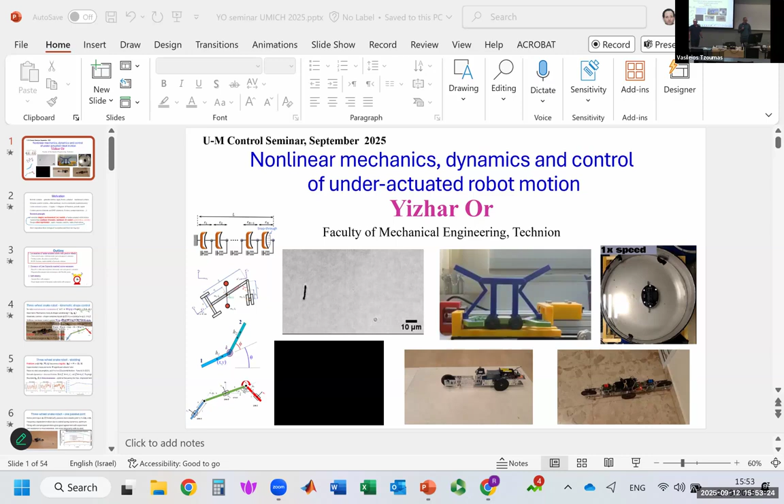So the title of the talk is Nonlinear Mechanics and Dynamics and Control of Under-Actuated Robot Motion. So now we're talking science.

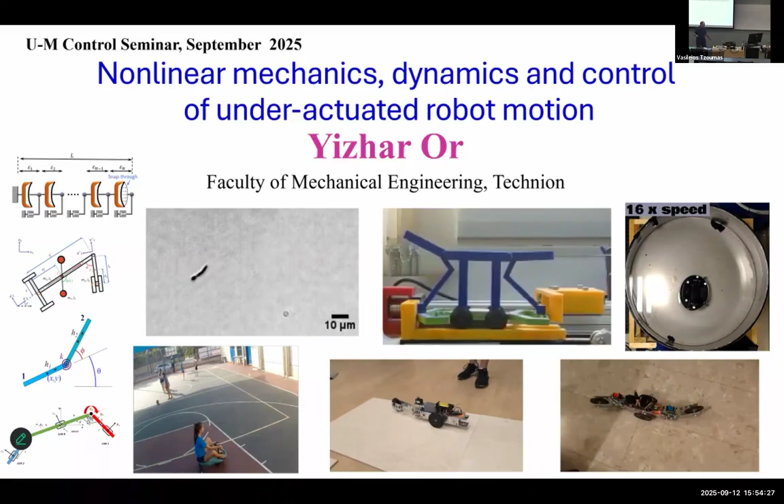I want to apologize that this is not going to be a standard seminar in control theory. I come from mechanical engineering and I come from robotics. So robotics, of course, is an interdisciplinary field that has aspects of computer science, if you will, computation, machine learning, AI, SLAM, localization, signal processing, image processing, path planning, algorithms. But I come from mechanical engineering, so my contribution is to think of a robot as a mechanical system that generates motion, applies forces applied on it, some actuation, and of course it has to move.

There is some motion, so obviously we have a dynamical system. Since we have actuation, we have inputs and outputs. It is a control system with or without feedback. Often the dynamic is nonlinear, sometimes involves constraints. I will talk a little bit about nonholonomic constraints, which are actually a very important part. Focusing on under-actuated systems, in which the number of actuated inputs is smaller than the number of degrees of freedom.

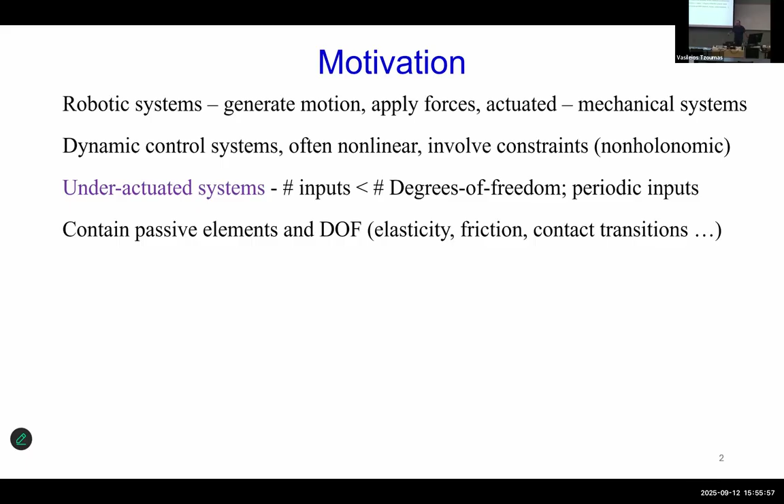This means that we have some passive degrees of freedom, non-actuated degrees of freedom, which evolve passively by mechanical effects like elasticity, inertia, friction forces, contact transitions, and many more.

Here is the overview of my research philosophy or my research principle. I try to start with a simple mathematical model. If they are not simple enough, I try to simplify them, try to find the simplest one. If they are complicated, I give them to Shai. If they are very complicated, I give them to Inigo, complex systems.

So I try to go with simple models of under-actuated robot motion and analyze the dynamics, apply analytical tools, the dynamics, the mechanics, the control, try to find the influence of the dominant parameters, try to do optimization of performance. You will see sometimes there are stability issues, try to think of conditions for stabilization.

And then we go to the lab and design robots, assemble the robots, fabricate the robot, and conduct experiments, as simple as possible, and then take the measurements and analyze the results, compare with the theoretical predictions, and make observations and conclusions. And then probably we find that some assumptions of the models are overly simplifying and we have some discrepancies, and then we need to improve the model, make it a little bit more complex, more rich, or with more rich dynamics, other effects.

And then we repeat the process. We can optimize the new model, try to find optimal performance and stability conclusions, and then go to the experiment, maybe design another set of experiments, maybe design a different robot, and do it in a cyclic manner, using the mathematical analysis to optimize the performance or better understand the robot, and use the robot experiments in order to improve the models, to improve fidelity of the models.

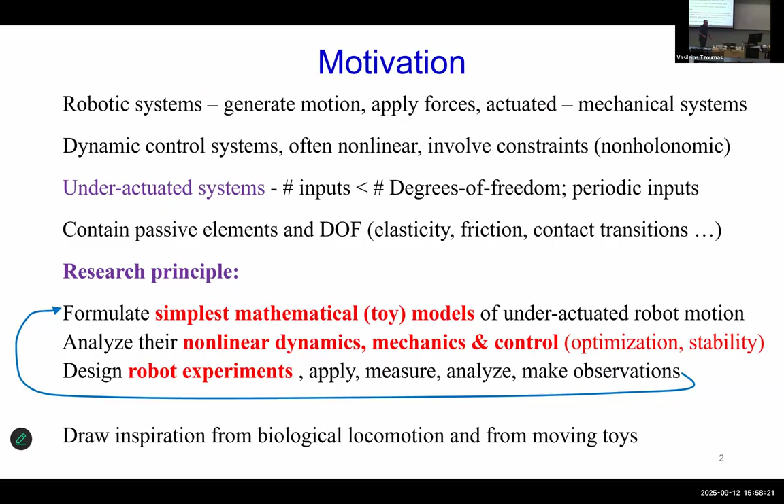So during this joyful process, I try to draw inspiration from biology, from biological locomotion, and also from cute moving toys. This is the outline of the talk.

So I have 3 parts. I'm not sure I will be able to cover all 3 of them in the same level of detail. Maybe at the 3rd part, I will have to quit or go faster. But let's see how time moves and how much you want to go home for the weekend.

So we start with the first part, which is locomotion of under-actuated robots with passive wheels, beginning with a very simple model, the 3-wheel snake, inspired by biology, by a crawling snake, which is doing something undulatory, something like a traveling wave.

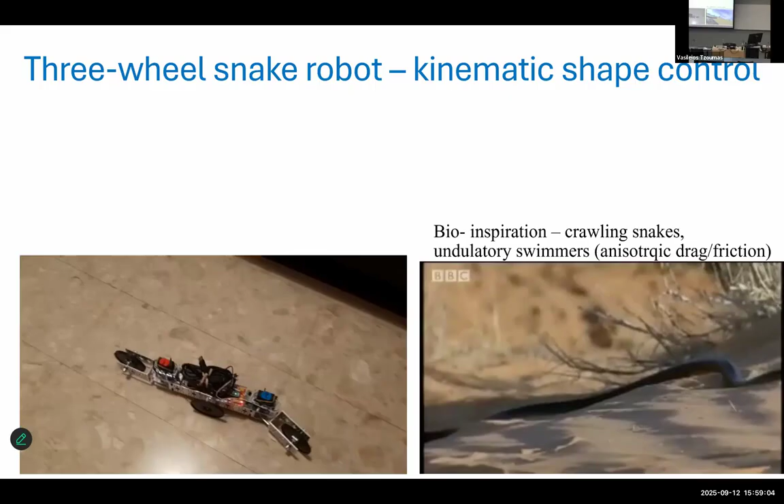Wait, this is the robot: three links supported by wheels, and they are connected by joints. On the joints, we have servo motors. This is the planar model sketch of this.

We have generalized coordinates, Q, the vector of coordinates. We have x, y, theta, position and orientation of the central base, the central link, and phi1, phi2 are the two relative angles at the joints, which we assume are prescribed or controlled by the servo motors.

The system has constraints. In a simplified manner, we assume that each wheel is free to roll in a tangent direction, but it's not allowed to skid or slip laterally. This imposes constraints which are linear in the vector of generalized velocities, q dot, and non-linear in configuration. So it's a matrix W times q dot equals the 0 vector.

In geometric mechanics, there is a concept of dividing the coordinates into body variables and shape variables. The body variables are x, y, theta, position and orientation of the moving base. And the shape variables are the internal shape, that's phi1 and phi2.

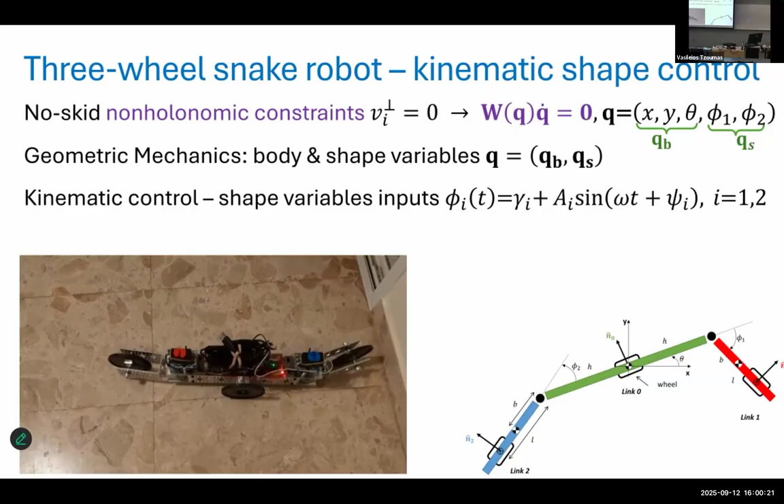Here we simply assume that they are actuated as a periodic sine wave with amplitude, frequency, and phase shift, just like this sinusoidal motion you can see in the movie.

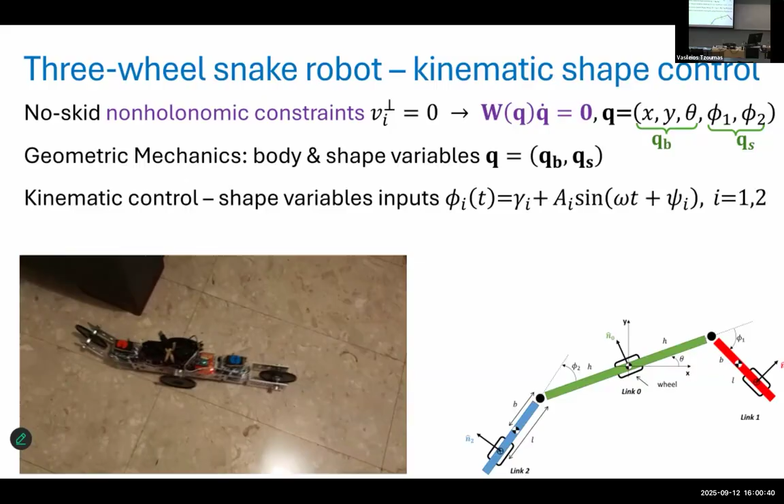You can look at this equation here, W, and actually decompose it into submatrices WB, WS, and a relation between the body velocities QB dot and shape velocities QS dot. This WB is a square matrix, and it can be inverted. Then we obtain a relation between the shape velocities and the body velocities, which is actually a first order ODE system.

Since we regard the shape variables as inputs, we have a driftless nonlinear control system. It's also called a kinematic system because it is time invariant, which means that if we take some trajectory in the space of the shapes, we can scale the time and follow exactly the same resulting trajectory in the body, but with the new time scale. So it's invariant to time scaling. For example, if I multiply the frequency by factor 3, I will get the same result, just the velocity is sped up by factor 3.

So in geometric mechanics, people who know how to do it, like Shai and Ross Hatton, and many more, like Tony Bloch, can evaluate these gaits and trajectories and find what is the net displacement. There are many nice methods that I don't have time to talk about today.

We also have the dynamic equations, mechanical equations, Lagrange equations with constraints if you want. One can use them, for example, for a given motion, to find out what are the constraint forces, this capital lambda here, and what is the actuation torque vector at the joints. So we don't really need them in this case, since it's a first order system, but we can use these equations to find the forcing.

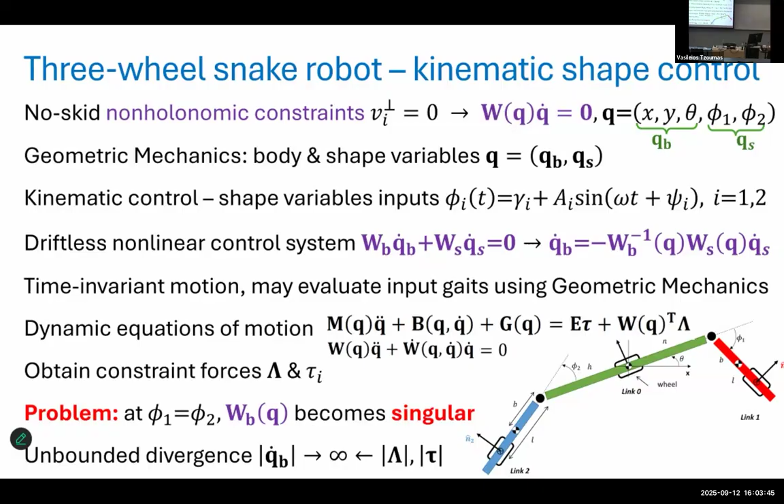What cannot hold is actually our assumptions. The non-holonomic constraints become linearly dependent, that's the singularity. This means that the no-skid constraints cannot hold. If we take the robot from the lab and measure the skid velocities, which are supposed to be 0, they are not 0. They're actually completely non-negligible, very significant.

Which means that we need to improve the model. We need to step back and relax the assumption of no skid, and assume there is possible skidding and friction forces, which follow some friction law.

So one way we did it was Coulomb friction. How many of you are mechanical engineering? Okay, so Coulomb friction is supposed to be familiar. I won't go into the details, maybe more of the physical side, but the problem with this is that it results in non-smooth equations.

So it's hard to integrate and definitely hard to analyze. If we want a simpler model and want to be lazy, a better solution is smooth dynamics with viscous skidding, viscous friction, which means the force in the transverse, lateral direction is linearly proportional to the skidding velocity with a coefficient.

We also add rolling dissipation because this is a physical phenomenon, so there is another damping coefficient in the rolling direction for each wheel. It's very easy to integrate this into the Lagrange equation. You formulate the Rayleigh dissipation function. If you study Lagrange equations, or if not, just Google the term Rayleigh dissipation, and you can integrate it into the equations.

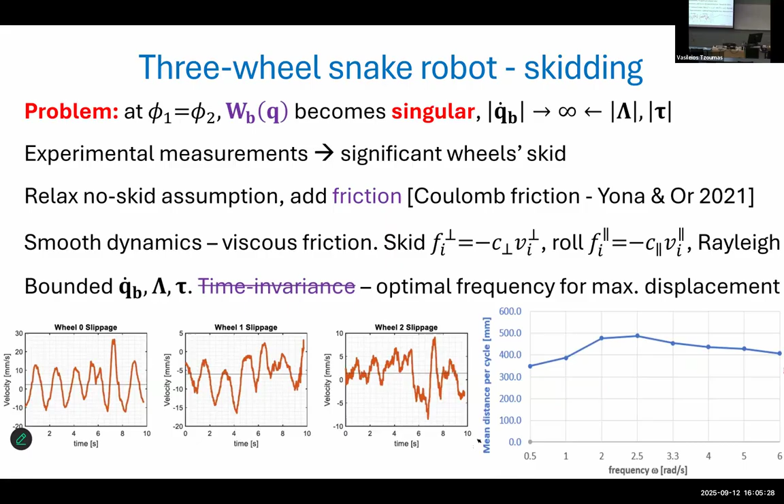The problem is now we don't have the first order equations, we have the second order mechanical equations. So the time invariance, the nice property of time scaling, is lost. If I do some sinusoidal input for the joints and change the frequency, the result will not scale in time - it changes non-monotonically.

So the actual displacement per cycle changes with the frequency, and we have an optimum. These are from experiments, and the theory supports this. You need, of course, to calibrate the damping coefficients to fit them to the data, but in principle we have it in experiments too, and in the simulations too.

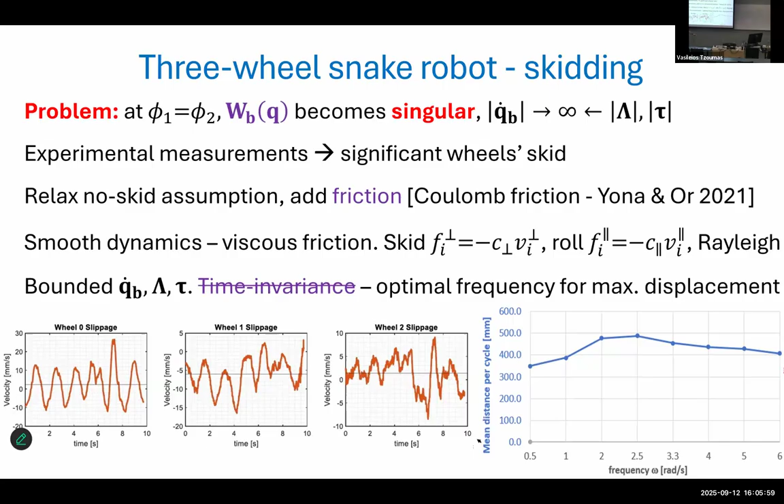So this is the kinematic snake with two actuators, one for each joint. There is another interesting configuration which we call semi-passive. Semi-passive means that one joint is actuated with a servo motor, but the other one is with the symmetric mechanism of a spring - easy to simplify this by a torsion spring with linear, torsional stiffness.

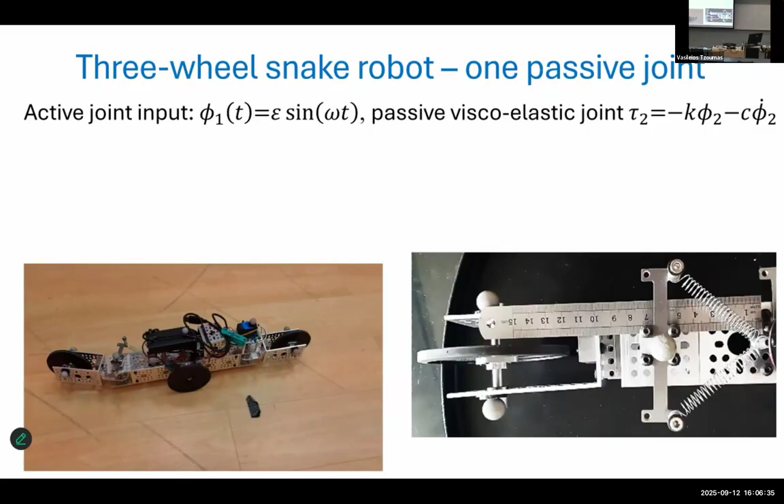We also need to add some dissipation, some damping, because the springs are never ideal, never fully conservative. Once we do this, we can also study, for example, what is the effect of sweeping frequencies, and again we have an optimal frequency which maximizes the velocity or the displacement per cycle.

Here we can take various versions - with rolling dissipation, without rolling, with skid dissipation, or we can even leave the non-holonomic constraints. The interesting thing is that it can cross singularities while maintaining bounded forces. Very interesting - the dynamics enforces this, but I don't have time to prove or detail too much about this.

So this is the three-wheel snake, but this is not the simplest possible toy I can think of, because it has 3 links and 2 joints. Think about something with 2 links and 1 joint.

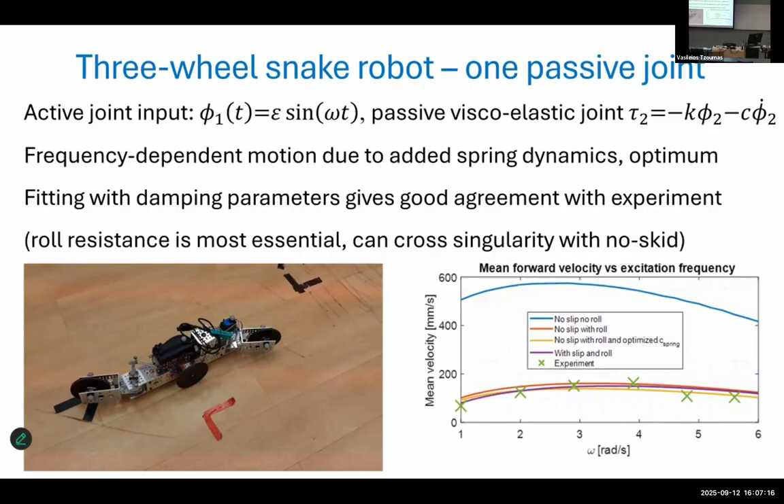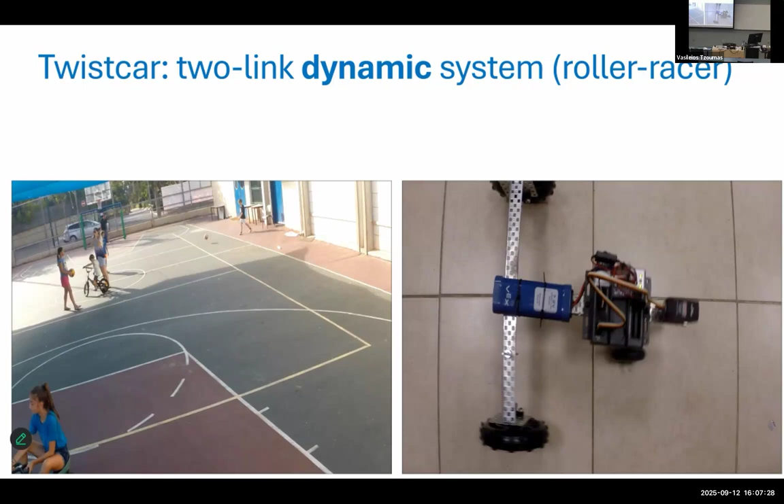Here it is - this is the twist car toy. It had an older name, Roller Racer, basically the same toy, but 30 years ago. The kid is riding on this toy - no need to push with the feet against the ground, no need to lean sideways, no need to go only downhill. You can go on a level flat plane, horizontal plane. All you need is to oscillate the steering handlebar.

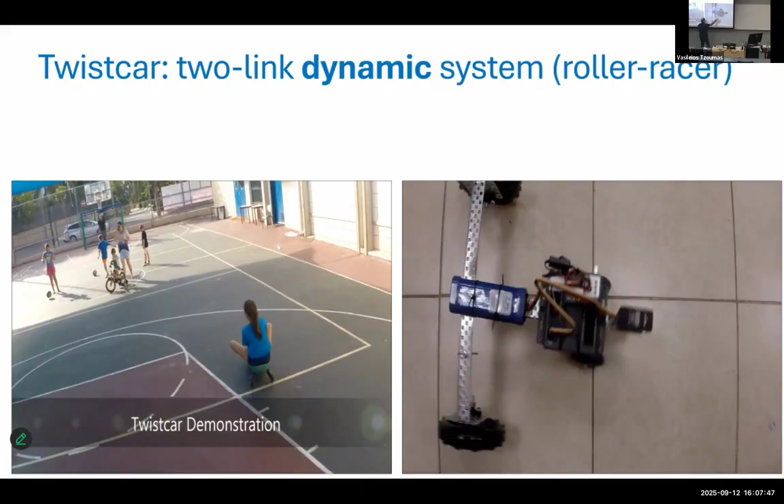And the robot demonstrates that there is this caster, this distance between the steering axis and the wheels, and this is actually generating some lever that pushes. So this thing moves.

So then we go to a model. Model, again, 2 links and 1 actuated joint. No skid constraints - we begin with no skid, assuming no skidding. So we have non-holonomic constraints.

The input is sinusoidal with frequency and amplitude and some mean value. The mean value, phi naught, according to the notation here - phi naught equals 0, phi naught equals pi - is just like the twist car. When the 2 links are folded one on top of the other, phi naught equals 0 is when it's open, in the straightened configuration. And for some reason, the toy roller racer is similar to the twist car, phi naught equals pi.

But in the analysis, in all the papers about roller racer, for some reason, they analyze this stretched configuration, and it turns out that this one is more interesting. So most of the time we also analyze this. It's basically not a really big difference.

The thing with the no-skid constraints is that now we have only two wheels, so this WB is not a square matrix, it's 2 by 3. So we need more information, and the information comes from the dynamics. We need some scalar momentum equation in order to complete the dynamics - it's not a kinematic system.

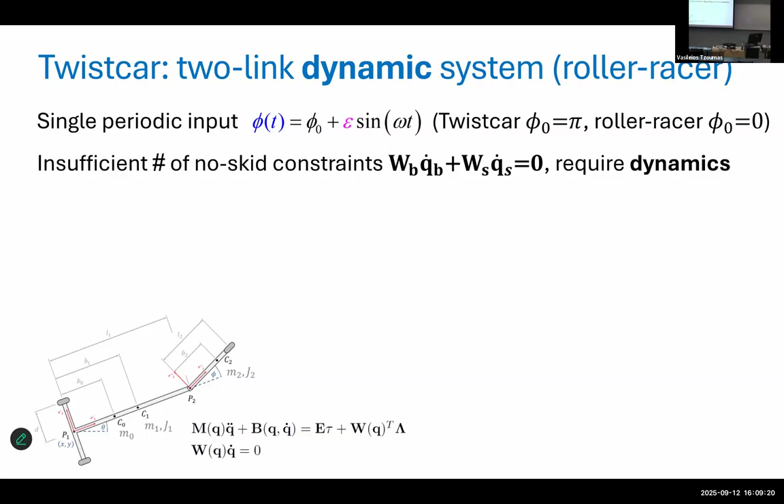It's not time invariant. One more thing that we did, which was not present in previous works, was to use the rolling resistance, because if we don't use any sort of this dissipation, we get something unphysical: the forward velocity oscillates but diverges to infinity, accelerating unboundedly, and the orientation angle oscillates with diverging amplitude, which is not physical and not observed in experiments. So it's very good to add this dissipation, and then we get convergence to periodic bounded motion.

Okay, the next thing is that we did some analysis, some simplification. We assumed small amplitude of the oscillation, call it epsilon, and then we do a perturbation expansion. Familiar to you guys? It's like Taylor series, but extended, like linearization, but you also take higher order terms, and then sequentially solve for each order of epsilon, for all the state variables of the dynamics.

Specifically, we're interested in the forward speed. So the forward speed is a power series in epsilon. In the steady state solution, the governing term is actually quadratic, multiplied by epsilon squared times V2. What is this V2? After some scaling, the non-dimensional order 2 solution looks like this. It has a constant, then a transient decaying term, and then a periodic term oscillating at double the frequency of the input.

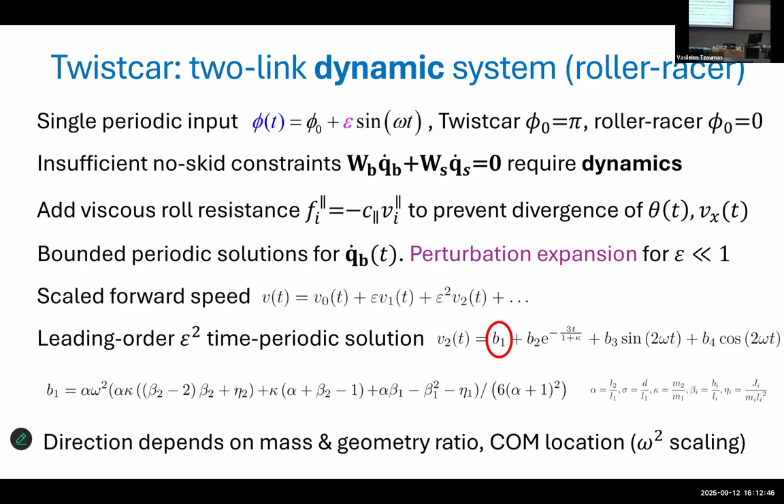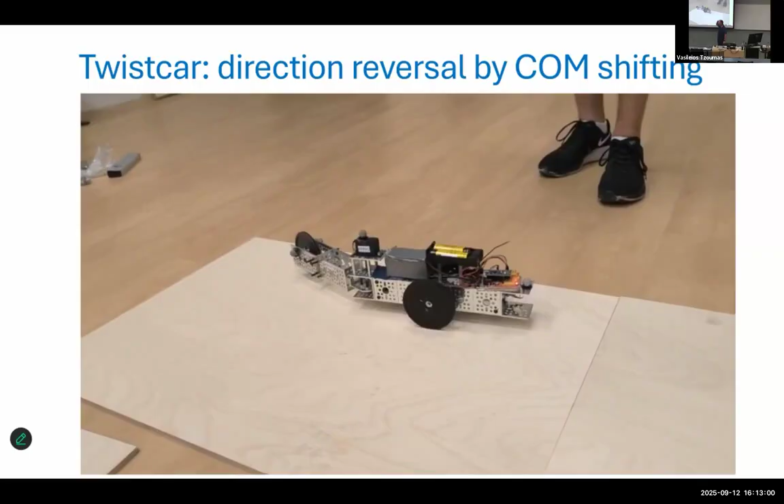We did it in experiment without a rider, but this here is something like a rider. This massive rectangular block, the black block here, can be removed, and when it's removed, the center of mass is shifted. The parameter values were designed such that removing the block will reverse the direction of motion. You can see now, beautiful, okay.

Okay, so this was working, but you can see a lot of skid. Can you see that the wheels of the smaller link are actually skidding a lot? So the no-skid assumption is not really realistic. What does this mean for us? It's like another homework: we need to go back to the model and add skidding. Actually, we see it in the experiment, non-negligible skidding, and we should add, again, the same trick.

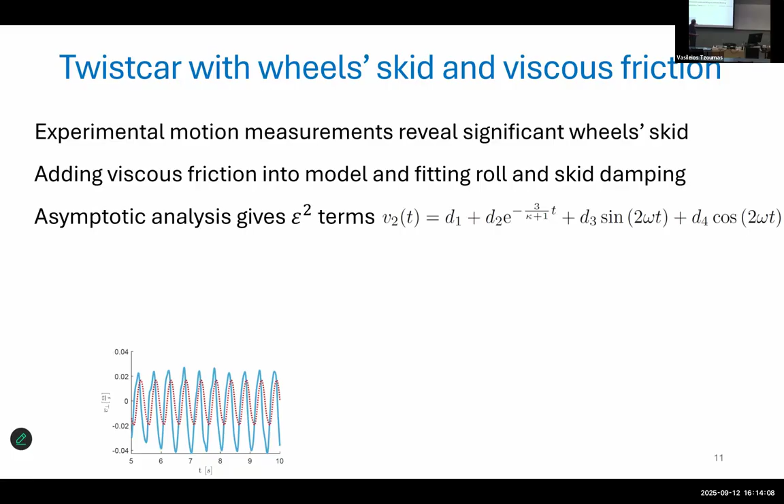We have viscous friction in the skid direction and in the roll direction, two different damping coefficients. Once we do that, we can go back to do the asymptotic analysis. It becomes a little bit more ugly. The structure here is the same, but the expressions inside are more complicated. D1 is now the mean speed, and all these A and B coefficients have a very long and very complicated dependence on parameters.

But more interestingly, the dependence on omega, on the frequency, is no longer monotonic. We have omega squared, but then it's multiplied by a rational function, polynomial over polynomial, of omega. This is interesting, and more importantly, non-monotonic. We found some realistic physical values in which, again, we can reverse the sign or direction of the motion by changing the frequency.

So for low frequencies, we can have positive mean speed, and for high frequency, we have negative mean speed. Let's do some experiments.

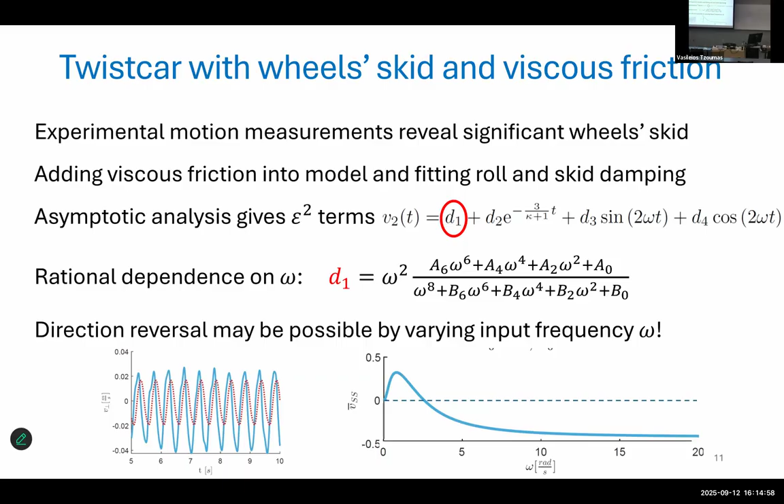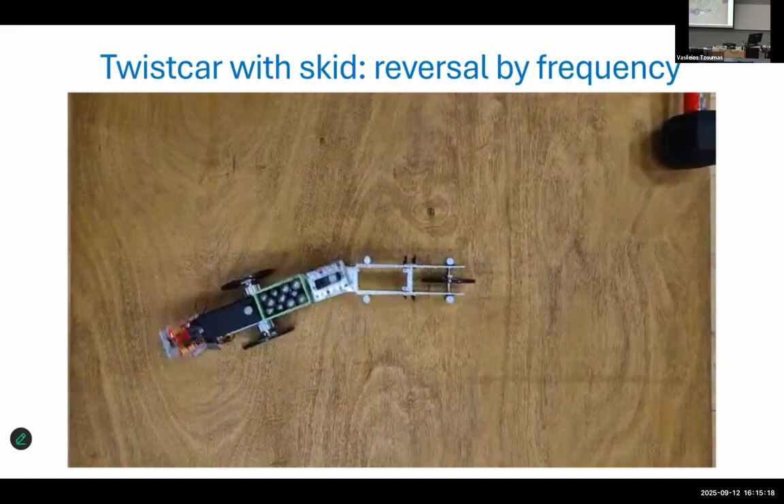Waving very slowly, low frequencies, it is moving slightly to the left, very slowly, because most of the motion is absorbed by dissipation, by the friction. Now let's try to wave with higher frequency. It takes time to reverse, but then it moves to the right? Okay?

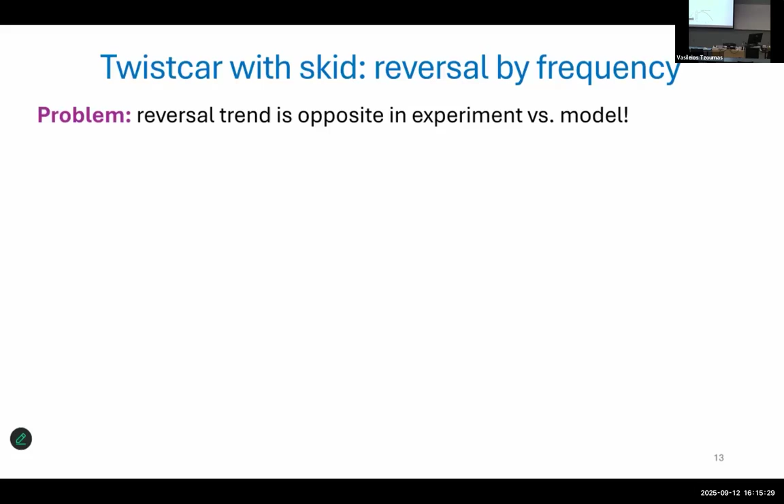But this is not right. This is actually the opposite direction. If I'm comparing now, again, the theory says that for low frequencies I have positive speed, for high frequencies I have negative speed. But there is a convention of notation: what is negative and what is positive? Positive is in the direction of the small link. That's our convention. And the experiment was just the other way around—for low frequencies, it was negative. What went wrong? Something was wrong in the model.

Any suggestion? What should we improve? Anyone speaking French? French scientist already mentioned. Charles Augustin, I think—that's the first name? Coulomb friction. Okay, think of electric charge. Coulomb law is okay for you.

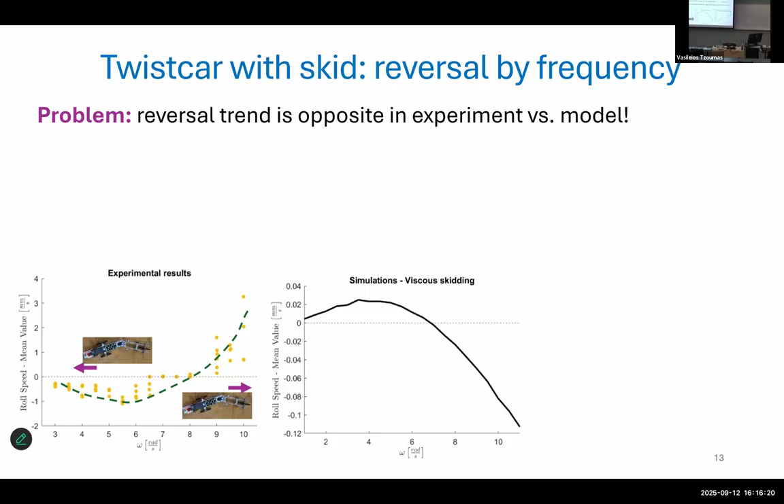So try to do Coulomb friction, or at least a simplified version of it, in which the lateral force is minus the sign of the lateral skid velocity times a constant. So it's piecewise constant, just sign dependent. When we do this in simulations, it's a little bit tricky to do the numerics, but we get the right sense, at least, of the direction reversal.

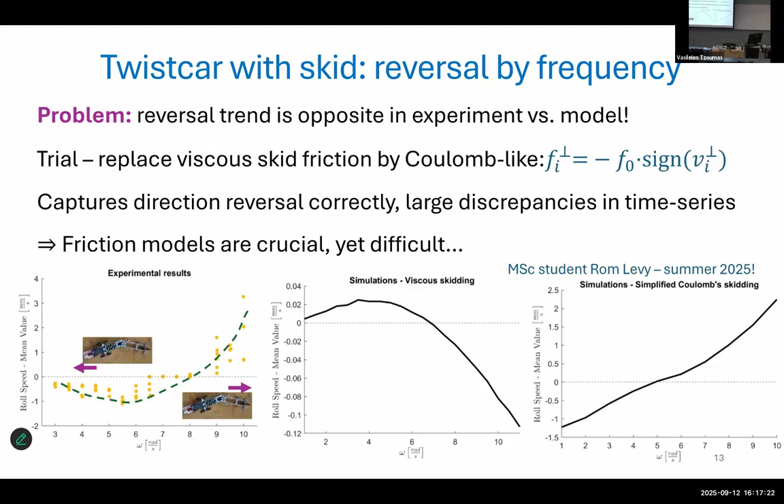But we have a lot of other large discrepancies. If you compare time series one to one, you will see a lot of discrepancies—it's not really working perfectly. All these are results from this summer; actually, this graph of these simulations I received only two days ago from my student, a wonderful student. The intermediate conclusion is that friction models are very significant and crucial, but it's difficult to identify them from experiments, and difficult to analyze them numerically and analytically.

Another toy, maybe more fascinating. You know the waveboard? Anyone here knows how to ride a waveboard? The rider has to do something like this, twisting the hip with its own inertia, which is larger than the board itself. And the wheels are free, but they also have axles—axles like this.

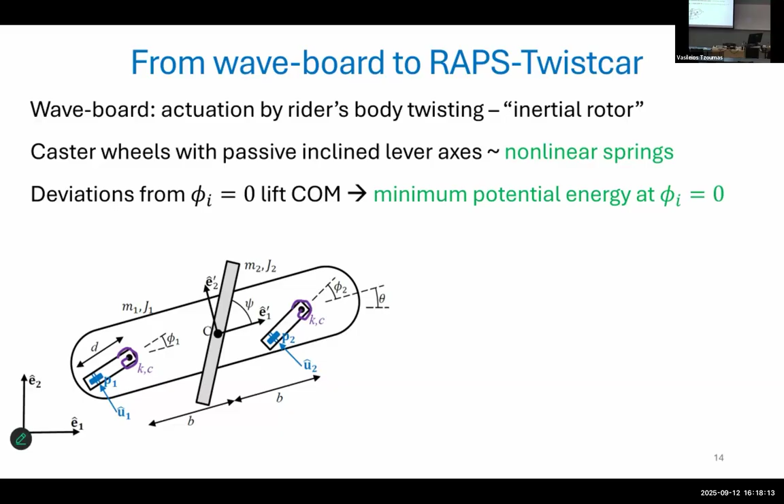But this was too complicated, so we can do numerics, but asymptotics was too complicated. So we chose a simpler model, a variant of the twist car. We call it RAPS twist car—rotor actuated passive steering twist car—which means it's the twist car, but now the steering angle is passive. There is no rider touching the steering wheel. This evolves passively, and the actuation is this hip joint, which is actually a rotor, reciprocating in some frequency and amplitude.

For simplicity, we begin with no skid constraints and add some dissipation, viscous rolling resistance. Also for simplicity, we assume that all the masses are negligible except for the rotor, because the rotor is our human, and the rest is just a piece of wood and wheels. So it's better to simplify.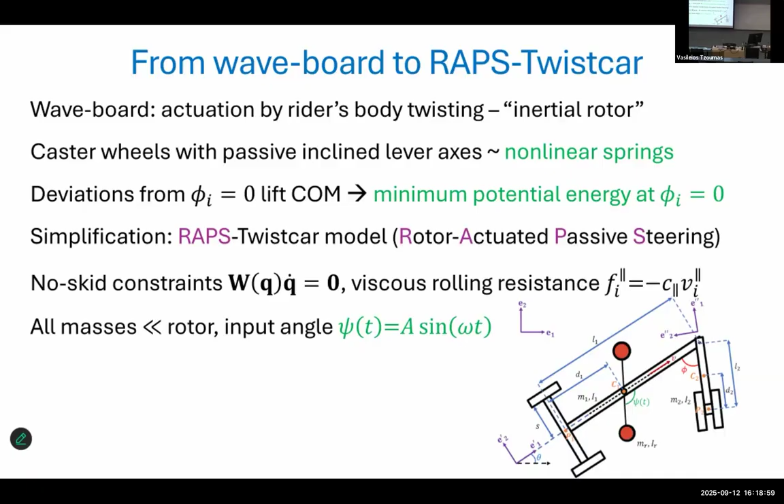Then we did some asymptotics. Again, we assume some small amplitude and do a perturbation expansion, and we get this expression for the mean speed, the quadratic term being the leading term. We actually find there is an optimal placement for the center of mass, or the center of the rotor, which gives the maximal speed. Delta is just the scaled distance of the center of mass.

So this is interesting, but this is not the end. What happens if we take another frequency? Let's take a lower frequency.

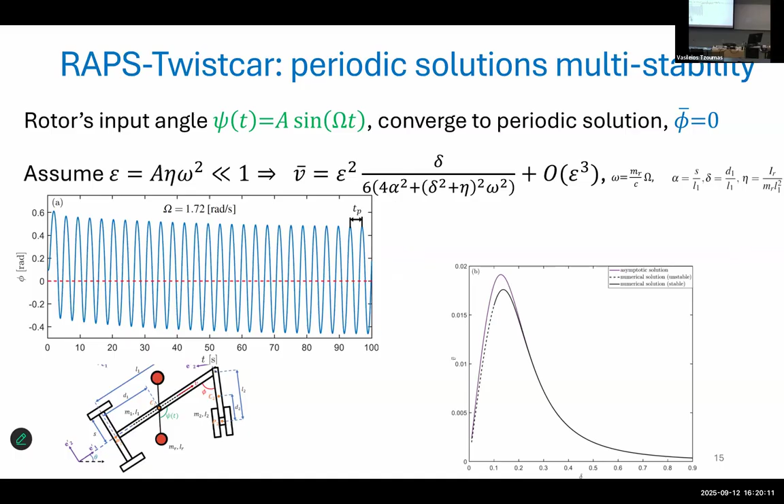And now what we get is that the steering angle phi is converging in steady state to periodic oscillations, but about a non-zero angle, which means the vehicle will move in circle. In average, it will move along a circular arc.

And what about the symmetric oscillation? It's not that this motion disappeared, it still exists. There is a valid solution for the system, which is periodic oscillations about 0, but it becomes unstable, which means any small perturbation will cause divergence of this solution, including numerical error, accumulating error in the integration. So it's hard to see it for long times in the integration, definitely with the initial perturbation.

What happens? Okay, this was one frequency, this was a lower frequency. What happens if we take an intermediate frequency in between? Now we get multi-stability. So we have a stable solution of oscillations about mean 0. We have the red one, a stable asymmetric solution of oscillating about some non-zero angle. And we have some intermediate solution, which is asymmetric and unstable.

So now we see that the parameter omega, the frequency, is actually affecting existence and stability of periodic solutions. So it is a bifurcation parameter. Anybody knows bifurcation?

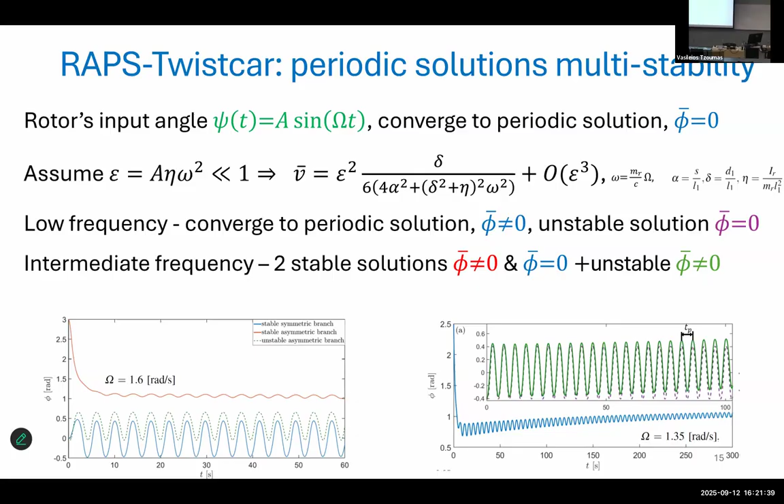Here is the bifurcation chart for this. So omega is the scaled frequency now, dimensionless, and phi bar is the mean value of the steering angle along steady state periodic solution. So phi bar equals 0, that's the symmetric solution of motion in a straight line on average. And the solid line is when it is stable, the dashed line is when it is unstable. And the colored ones, the red and blue, are actually non-zero mean value.

These are the asymmetric solutions in which the vehicle goes in a circular arc. And now you can see that in some regions we have this multi-stability. This is stable, this is stable. In some regions, only asymmetric is stable. And in some ranges, here we have, this is called the fold bifurcation.

And what's the name of this bifurcation? It looks like a fork, right? Pitchfork. Subcritical or supercritical? Think about it. Okay, and beyond that point to the right, there is only one solution, only the symmetric solution.

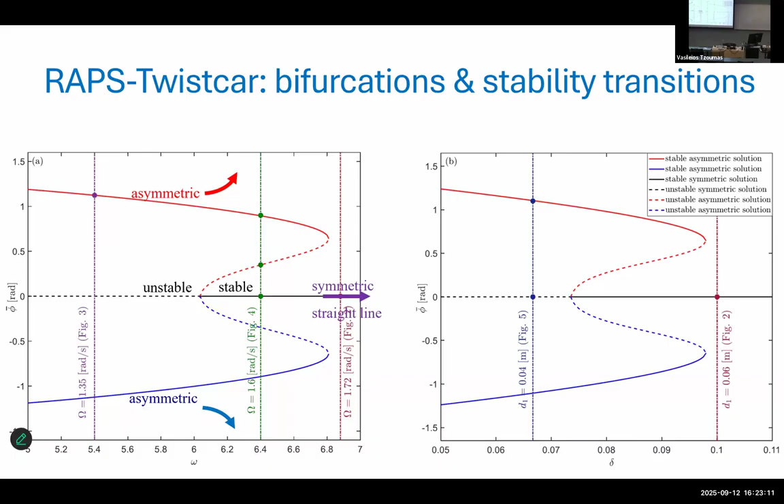And if you think that the bifurcations are occurring only for changing frequency, no. You can fix the frequency and change delta, the center of mass position, and you have bifurcations also with respect to that parameter for constant frequency, which means that these are two very significant governing parameters of this beautiful nonlinear system. And they govern, for example, the stability or instability of the symmetric solution, the one which is oscillating about 0.

And in the plane of omega versus delta, we can plot the regions of stability and instability of this symmetric solution. And the red curve is the stability transition curve. Here it was calculated numerically. And if we want to approximate it asymptotically, we need to do a lot of hard work. It's a paper which is right now on arXiv, not yet accepted, it's in minor revision.

We need to do harmonic balance and finding the bifurcation condition. We get a very complicated polynomial system. And then we need an extra assumption of another scaling parameter, which we assume to be very small.

Do I need to worry about people wearing face masks? I'm joking. Okay, so...

After a long work and a lot of neglections and simplifications, we obtain this biquartic polynomial in omega, which is a nice approximation of the stability transition curve.

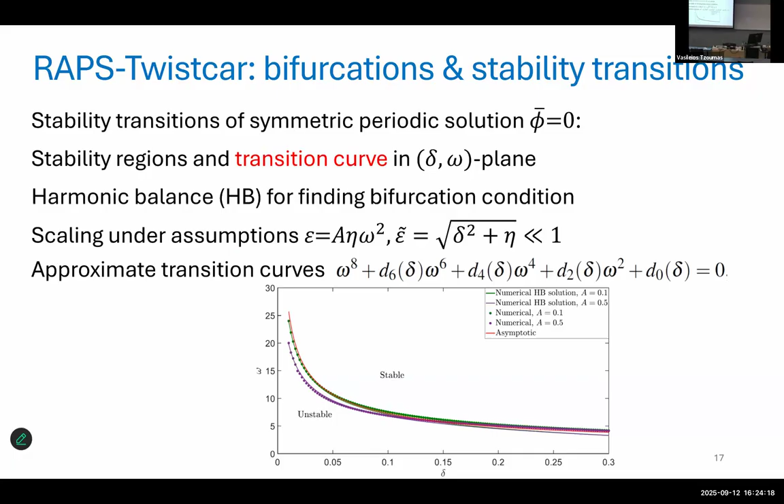How about experiments for this? These are in very preliminary stage. They are not very nice, but I still wanted to show you that not everything is nice at the first shot. So the rotor is not having sufficient inertia, so it's not really traveling anywhere. But when the student is trying to fold it, to put it at phi equals 0, it is repelled. And it looks like it converges to something asymmetric.

By the way, phi equals pi is also a periodic solution, an unstable one. You see, it's repelled from this.

Can you tell me on the graph, in which region are we? In which region are we on the graph? Are we in small delta, medium delta, large delta? From this stupid movie. Anyone? You have 33%, you can guess.

So the symmetric solution is repelled, it's unstable, and the asymmetric solution looks stable, so I would guess we are between this and this on the left side. Okay?

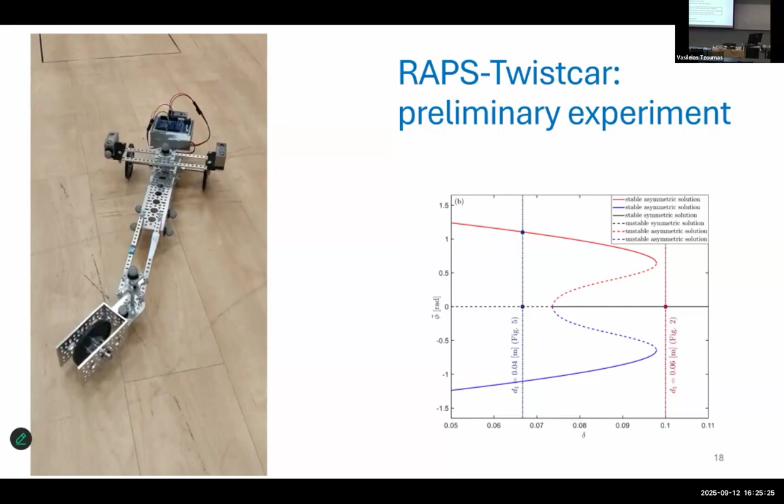Let's move to dynamics of micro swimmers. How is my timing? I think I will have to skip the soft robotics.

Okay, micro swimmers. We start with the Purcell swimmer. Who knows the Purcell swimmer? It's very famous literature for those working with microorganisms or locomotion. It's a simple model of swimming organisms, microorganisms like sperm cells. It consists of 3 links connected by joints, no wheels at all.

The actuated inputs are the 2 relative angles, phi1 and phi2, which move periodically. In the original paper from 1977, it was a square loop in the plane of phi1, phi2, something like right, left, something like this.

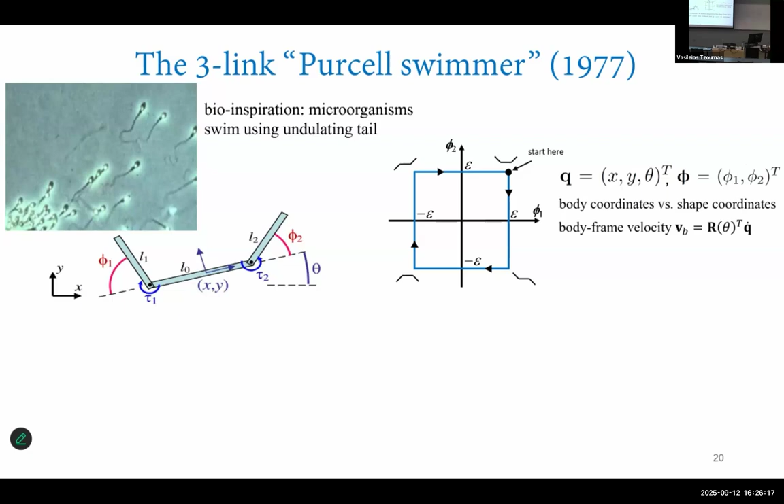Again, we have body coordinates and shape coordinates, but formulating the dynamics took 25 years after Purcell. The paper by Becker used assumptions of Stokes flow, meaning that for each moving rigid body, the forces are linear in the velocities, resistance drag forces.

For slender links, there is a proportionality between the resistance coefficient in the direction normal to the elongated link and the direction tangent to the axis of the link. In infinitely slender bodies, this factor is 2. There is anisotropy between resistance in different directions.

That's actually the driver of the motion. So another assumption is that we neglect inertia - it's low Reynolds number. If you're a mechanical engineer, you know Reynolds number, right? So we neglect inertia.

We have quasi-static motion, which means that the sum of forces and torques on the swimmer must be zero. Since forces and torques are linear in velocities, this gives a linear relation between shape velocities and body velocities, just like the non-holonomic constraints, but they come from a different physical origin.

There's no skates, no skid - it's something from forces. This gives a driftless nonlinear control system relating the shape variable velocity to the body variable velocity. Again, a kinematic time-invariant system, but different physics.

When applying periodic inputs like the square, what is the circle? The circle means that phi1 is epsilon cosine omega t, phi2 is epsilon sine omega t, with a phase shift between them - something more continuous.

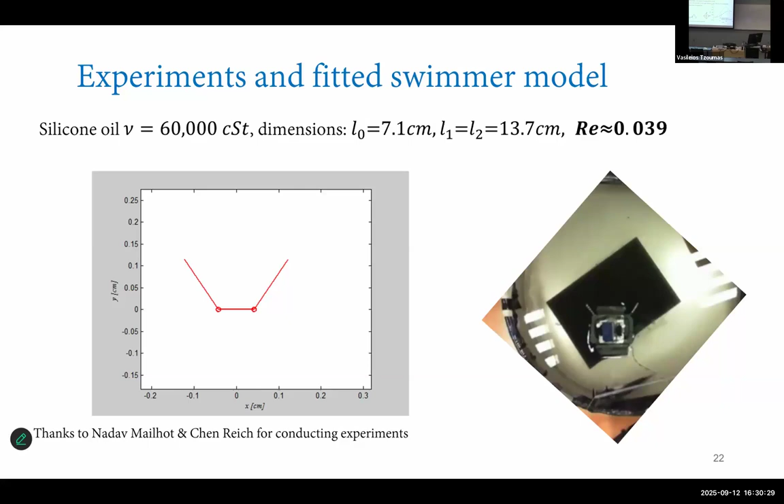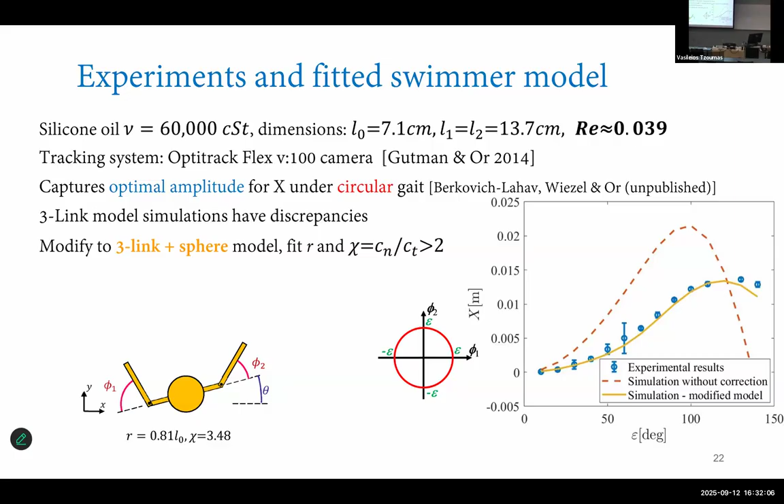But then we were greedy. We were still unhappy because we weren't able to show reversal, directional reversal. So some years passed and we built another robot. Now it was untethered, and these results are really from the recent months.

Okay, we were very happy. By the way, how did we know to take this particular phase and this particular aspect ratio? Why not 90 degrees to the other side? The answer is not in the slides - it's actually some geometric mechanics. We evaluated the height maps of Ross Hatton for optimized coordinates, and from this we can tell what we should do in order to get a reversal in direction at small amplitudes, because we had a limitation on the amplitude. This happens here in less than 50 degrees - our amplitude was limited to something like 20, 30, 40 degrees.

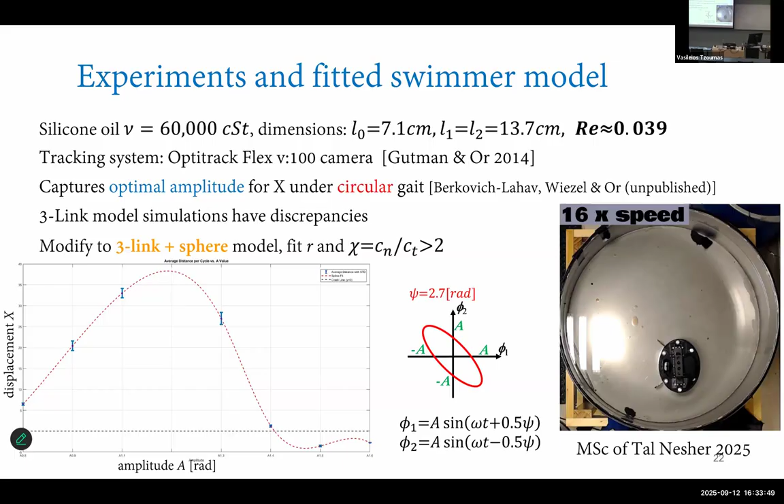Things I will not include today: optimal control. What can we do if we want to optimize even better, to consider gaits or trajectories in the shape space which are not necessarily sine waves? Can we do better in terms of displacement, in terms of energy expenditure? For this we did optimal control, the Pontryagin maximum principle - is this familiar to graduate students, maybe? And also using the geometric methods of Ross Hatton.

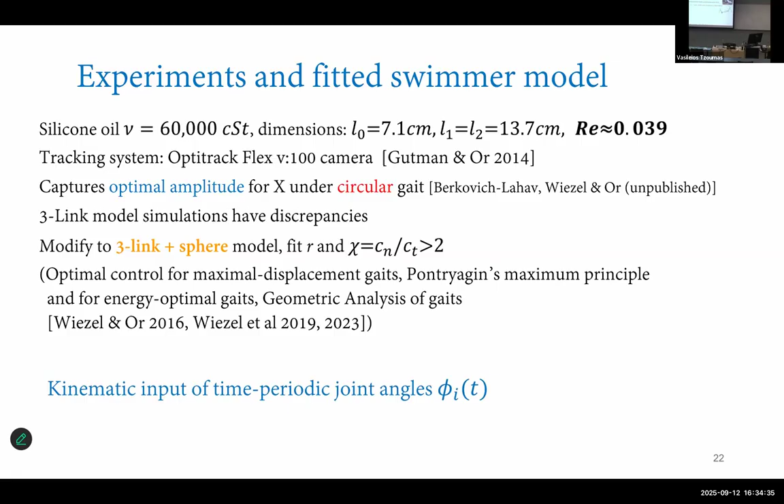So for displacement, at least we were able to do it. Sorry, I know it's a control seminar, but I have to put this in parentheses. The thing is that, again, the Purcell swimmer - all this is a kinematic system. What happens if we have a semi-passive system? It's more realistic because we have some structural elasticity in any organism waving a tail - it's not controlling its own shape. So the simplest way to do it is, again, semi-passive: one torsion spring, a passive joint, and one actuated joint, which can be actuated kinematically. Later we also did it with torques, but that's another story.

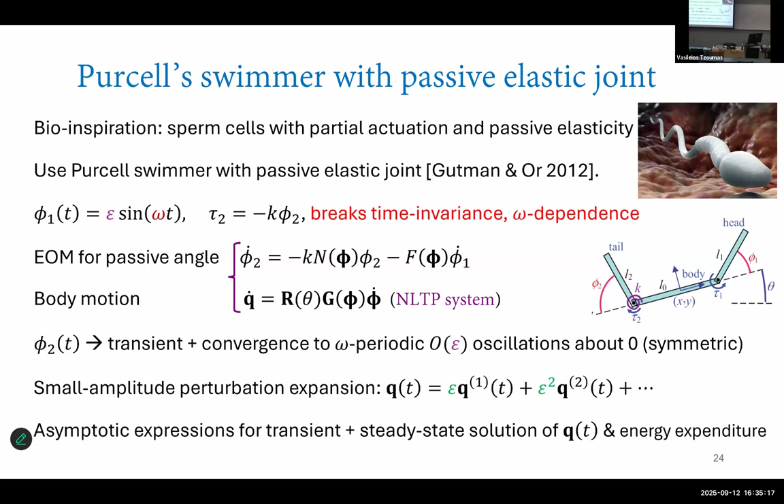I'm skipping this because we did basically the same story. We were able to show analytically that there is an optimal frequency maximizing the displacement per cycle - like a resonance-like phenomenon, the best frequency that excites the swimmer to the best. Best is our definition - it could be energy efficiency, it could be displacement.

I had more slides, but I had to cut them out because of timing.

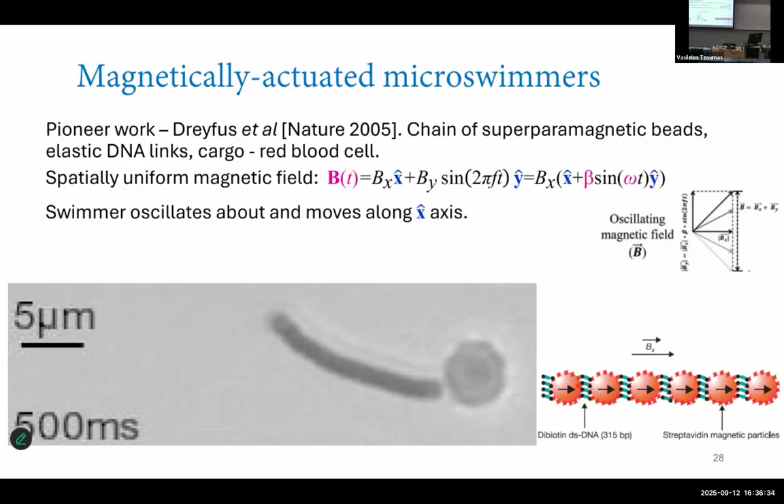They were able to show experimentally and also analytically, numerically, that there is an optimal frequency that maximizes the swim speed, with constant beta, with constant amplitude of the magnetic field.

And then they did something else. They fixed the frequency and started to change the amplitude in experiments and in their simulations. And they argued something very interesting: above some critical value of this beta, the amplitude ratio between the constant X component and the oscillating Y component of the magnetic field, beyond some critical value, there is a complete change in the motion. The swimmer is actually flipping 90 degrees and starts to move in the Y direction instead of the X direction.

They also argued that this critical amplitude ratio was square root of 2, and that this happens regardless of frequency, independent of the frequency. It's not that they didn't do analysis - the analysis was partial, so it was left as an open question, and I will get back to this in one or two slides.

So remember this question: why is it moving in the Y direction? B x - that's the magnetic field.

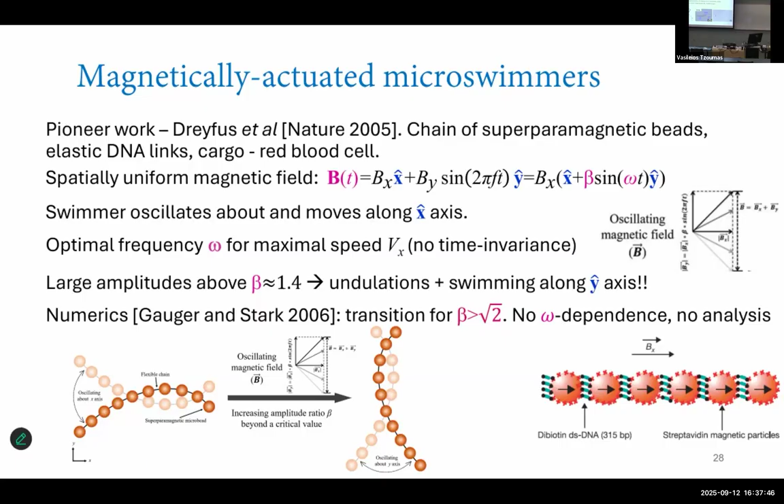Later on, my collaborator at Zurich, Brad Nelson, was able to fabricate much simpler micro-sized swimmers. For example, this two-link swimmer - there is a nickel head. Nickel is ferromagnetic, and this semi-flexible polypyrrole, and there is a short flexible hinge here that in the model was short enough that we modeled it like a pointed torsion spring.

And you apply a similar magnetic field, constant in the X direction, with small oscillations in the Y direction. The torque acting on any magnetized link looks like this: cross product between magnetic field and magnetization vector, which is proportional to minus sine gamma. Gamma, you can see here, is the relative angle between the direction of the magnetic field and the direction of the magnetized link, which means that the torque is actually acting to align the link with the magnetic field like a compass needle.

But this magnetic field is rotating. It's not constant direction - that's why the swimmer is swimming.

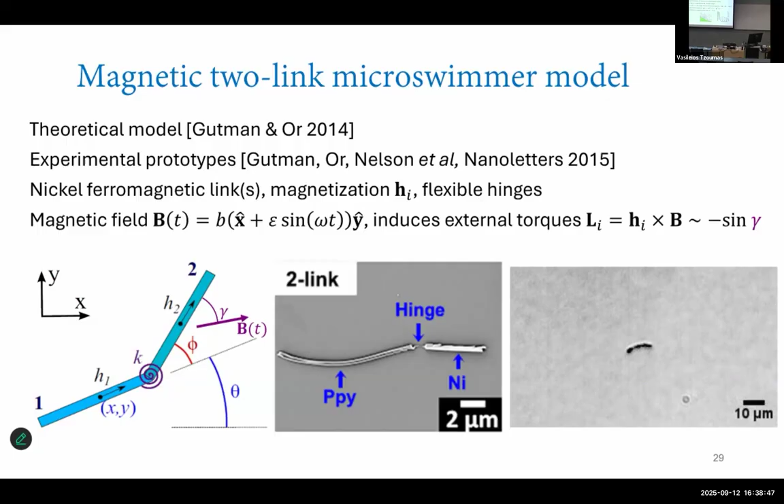So we were able again to do all the boring stuff, perturbation expansion, to get fancy expressions for the speed and for the energy. And we're able to find the dependence on parameters. Now we have additional timescales in the system, so we can find not only optimal frequency, we can find optimal non-dimensional stiffness of the joint. And we can also find, if we allow the two links to be magnetized, the optimal ratio of magnetization.

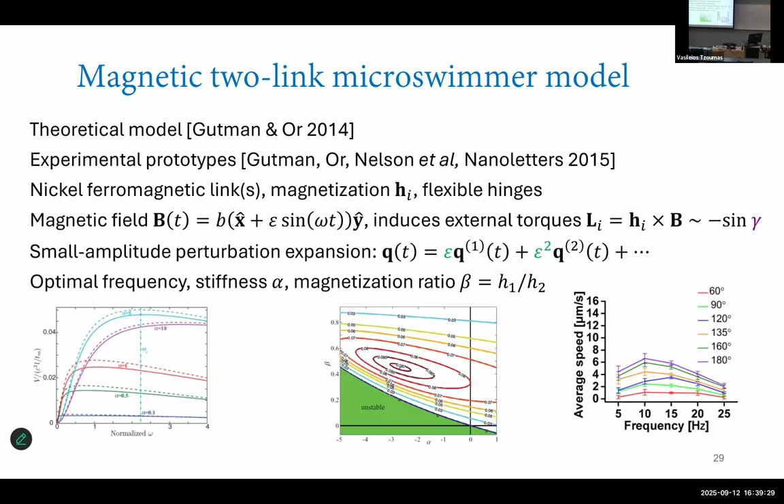Okay, once we did this, we wondered if we can explain the question about why the Dreyfus swimmer was moving in the Y direction out of the blue. So the thing is that in the Dreyfus swimmer, there was a difference - the links were not ferromagnetic like nickel, they were beads which are super paramagnetic.

Okay, so I'm not an expert in magnetism, but we decided to assume it's a two-link swimmer, a simpler swimmer, but now the head is super paramagnetic. Even though I'm not an expert in magnetism, I read the literature and I know that the torque has a different expression. The torque acting on the link is a more complicated expression, but in bottom line, it is quadratic in the intensity of the magnetic field, but it is proportional to minus sine 2 gamma, double the relative angle.

And this starts to give some explanation, because now suppose that the magnetic field is fixed in a given direction, maybe in the X direction. What are the equilibria? The equilibria are zero torque, so sine 2 gamma equals 0. It has 4 solutions in the circle: 0 and pi, a solution in which the link is aligned with the magnetic field and anti-aligned with the magnetic field, and plus minus 90 degrees, which also gives sine 2 gamma equals 0. So also the perpendicular - we have other solutions, the X and the Y orientations.

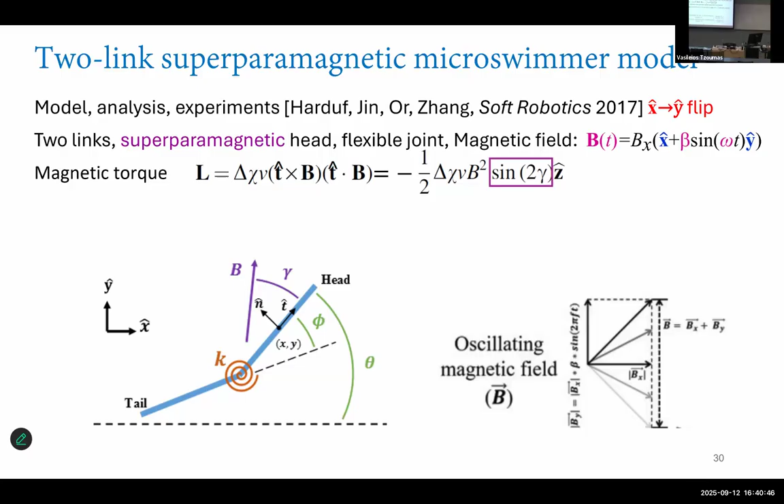Now we wrote the equations. The equations are just for 2 angles, phi and theta. Phi is the relative angle of the joint. Theta is the orientation angle of the head link. And these are the equations after identifying the time scales: nonlinear, time varying, time periodic system.

If we set beta to be 0, meaning there is no actuation, just a static magnetic field in the x direction, then it becomes a time invariant system, and it's easy to find, even though it's nonlinear, the equilibrium states. So phi in equilibrium is 0, and theta can be 0, pi, or plus minus half pi.

But now we can actually analyze linear stability, right? Linearization, familiar with this? Linearization, linear stability. We can find that the aligned and anti-aligned states are stable, and the perpendicular ones are unstable. This is statically unstable. But when we start to oscillate the magnetic field, it turns out that there is a change in stability. Something which was statically unstable, as a periodic solution about the same equilibrium, can sometimes be stabilized.

Does this ring any bell to somebody? Something with a pendulum? Which pendulum? All right, okay, let's see.

So one thing that we did: first, the asymptotic limit. I will continue until the end of part 2 - is that okay? It's like 3 slides or 2. I will neglect part 3 because I'm running late, not only because of the protest, but because of myself, okay? Because I'm too slow. Maybe I'm enjoying too much.

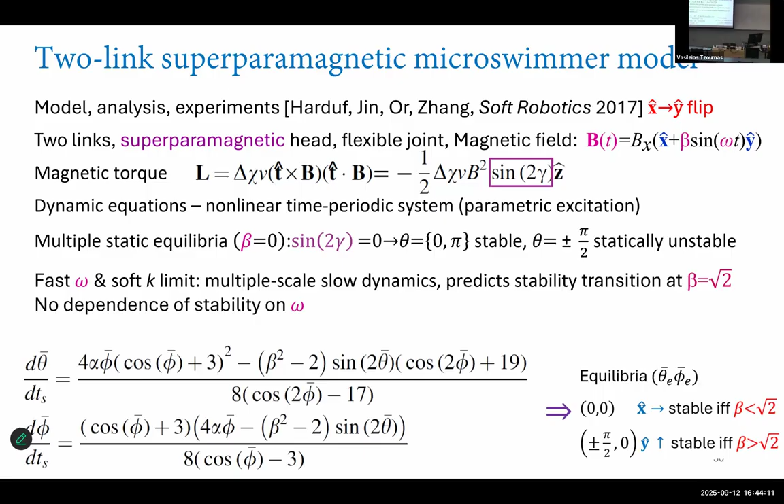So then we considered another limit: fast and stiff, with a very short viscoelastic time and very fast actuation. In that case, mathematically, we could eliminate the equation for the angle phi and plug it into the equation for theta, giving a second order equation for theta. After rearrangement, it looks like a mechanical equation, even though there is no inertia in the system.

It looks like a second order equation with linear damping, but multiplied by a time periodic coefficient. The stiffness term is also time varying, and we have an external periodic term. So this is reminiscent of...

Kapitza pendulum. So if you don't know the Kapitza pendulum, let this movie be the only thing you take home from this, and later you can Google it and study it on YouTube. It's a wonderful analytical dynamics problem.

A pendulum has two equilibrium points: the downward equilibrium point, which is stable, and the upward equilibrium point, which is usually unstable. If I'm perturbing it, trying to put it on its head, it will fall.

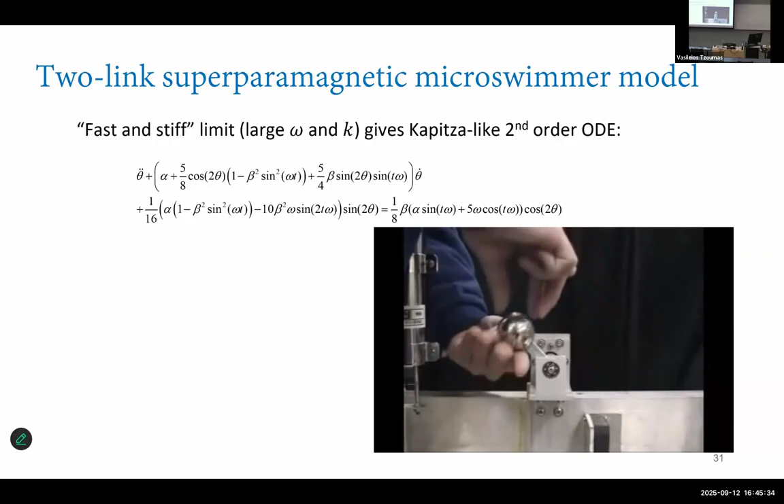What happens when you start to oscillate, vibrate the base vertically at high frequency? The upward equilibrium can be stabilized for sufficiently large high frequencies. This is the movie - it will be recorded, and you can find it on YouTube. So now when the base is vibrating, the statically unstable upward equilibrium becomes stable.

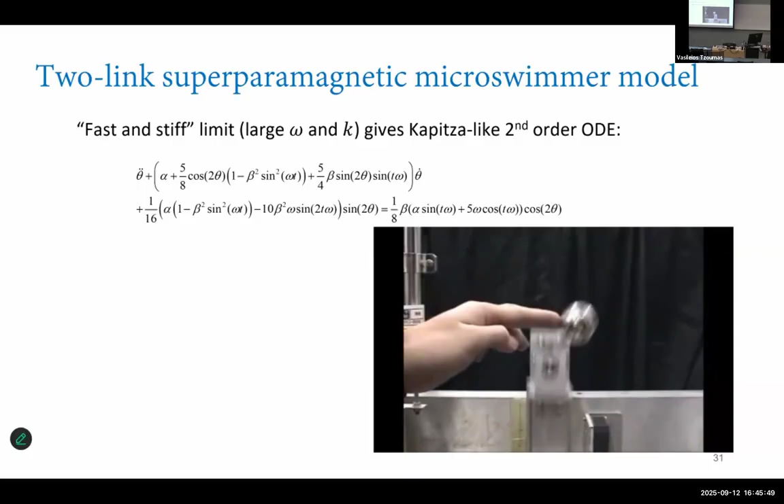So our equation is more complicated than the Kapitza pendulum - I think it's 3 times longer. So we had to do a lot of math in order to find the stability conditions and asymptotics. I'm skipping all the math here, but we found that the conditions for stability depend on both frequency and amplitude.

And we have regions in which both solutions of X and Y are theoretically stable, bistability, multi-stability.

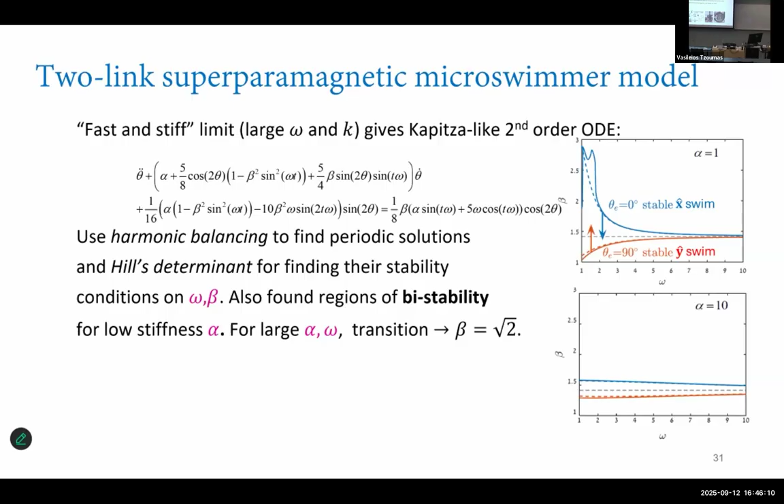Then I collaborated to build microswimmers, with a group from Chinese University of Hong Kong. They built the swimmer, which is about 25 microns, actually less, with a super paramagnetic head, a coil setup for magnetic actuation, and a microscope to view the results and take measurements.

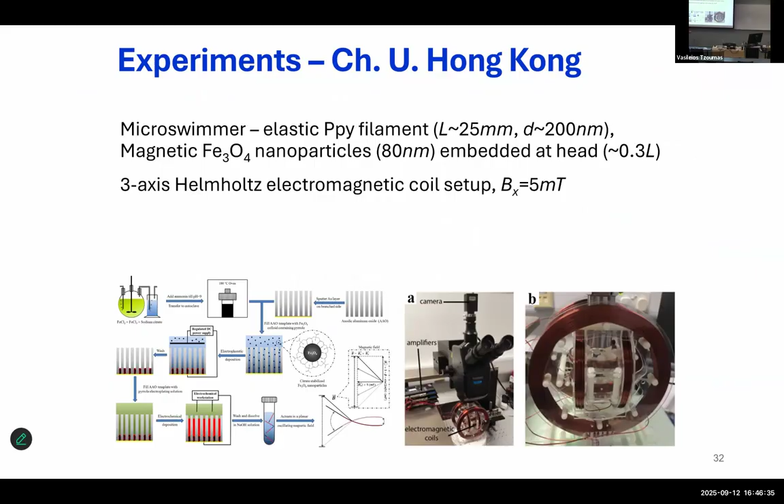This is from the microscope. First experiment, small amplitude, sweep on the frequencies. For small amplitude sweep on the frequencies, all the motion is in the X direction, and there is an optimal frequency that maximizes swimming speed, just like Dreyfus with all the beads.

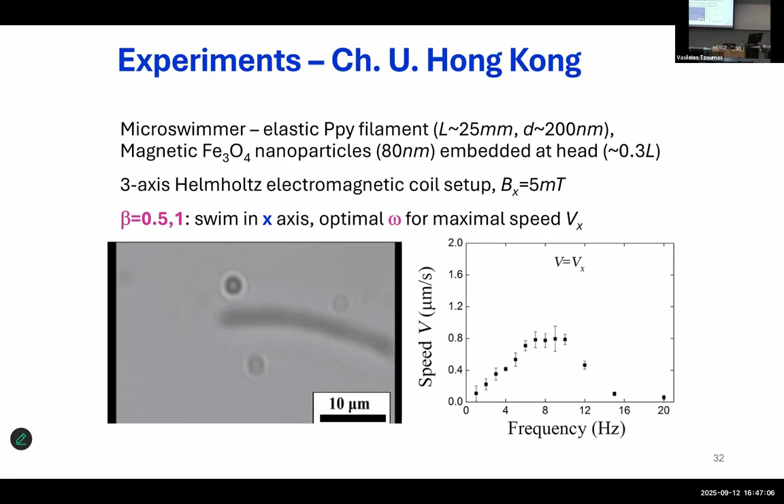To demonstrate the dependence also on omega, we increased beta, kept it constant, and started to sweep the frequencies. When we did that, there is this flip, the expected flip. So when beta is constant at something which is not square root of 2, we increase omega, and there is a critical omega for this 90-degree flip, like a Kapitza-like transition in the stability.

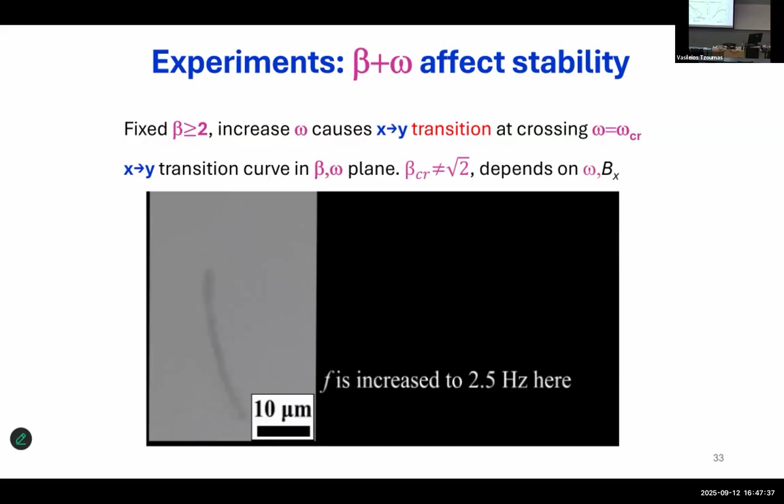Which creature is doing this? This is a very famous model organism, the E. coli bacteria, mentioned in Purcell's paper and in the very famous Howard Berg book.

After some decades, people were able to fabricate these corkscrew microswimmers. It's about 50 microns long, with a very small micro-sized helix attached to a nickel head. The magnetic field now rotates in the XY plane. Ignore the H, it can be made zero. So it has only rotation in the XY, that's enough, and this swimmer just screws its way through the viscous fluid.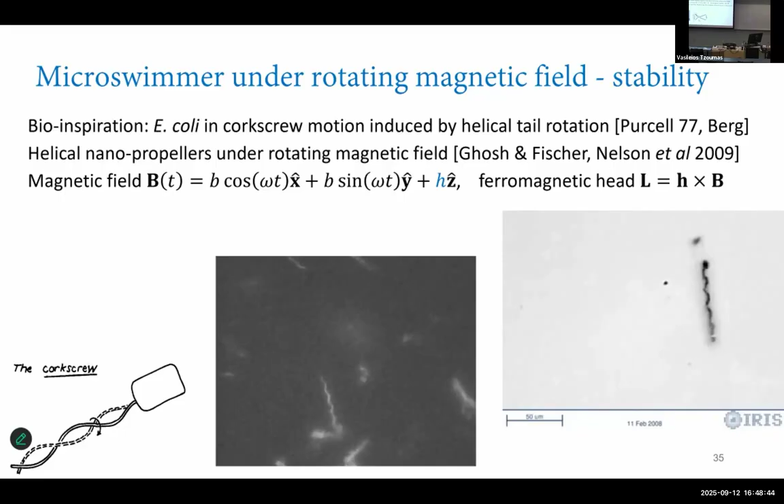The downside is that it's very hard to fabricate this helical structure. It was, maybe now it's easier, but it was very difficult. We found out with our collaborator that you can do it also with the same tumbling swimmer, using a flexible hinge under a rotating magnetic field in the XY plane. It has very interesting dynamics, reported in one experimental paper and one theoretical paper only.

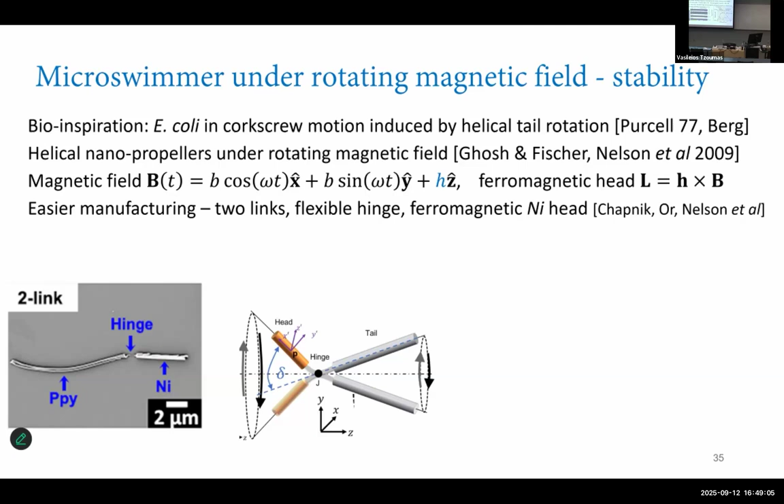Here is the interesting frequency dependence. For low frequencies of the rotation of the magnetic field in plane XY, the swimmer just stays in XY, following some phase shift from the magnetic field, but doesn't go in the Z direction at all - no swimming. After some critical frequency, this planar solution loses stability and bifurcates into a solution that goes out of plane and starts to move in the Z direction, with the trajectory of the points of the swimmer actually being helical.

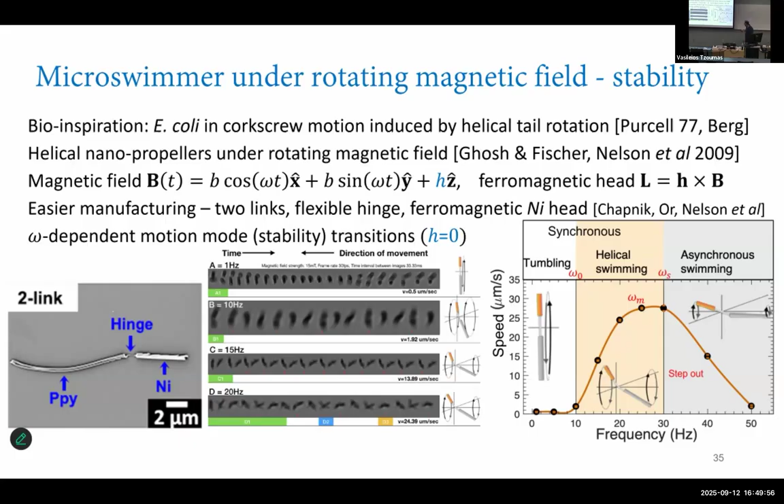After a while, we have an optimal frequency for maximizing the speed. And after more, we have a step-out frequency, when we lose synchronization between the magnetic field rotation and the swimmer rotation - the phase shift is not constant in steady state. In a paper now on arXiv, we were able to analyze this and get nice analytical results.

This is the work of Tzvi, the joint PhD student for Shai and me. During his PhD, he worked on something about microswimmers.

The two-link swimmer looks simple, but it's more complicated because it's now in 3D. So we need not only a single angle theta and phi, we have spatial angles, Euler angles for describing the spatial kinematics of the head orientation - beta, theta, psi, delta. So we have four angles, including the joints.

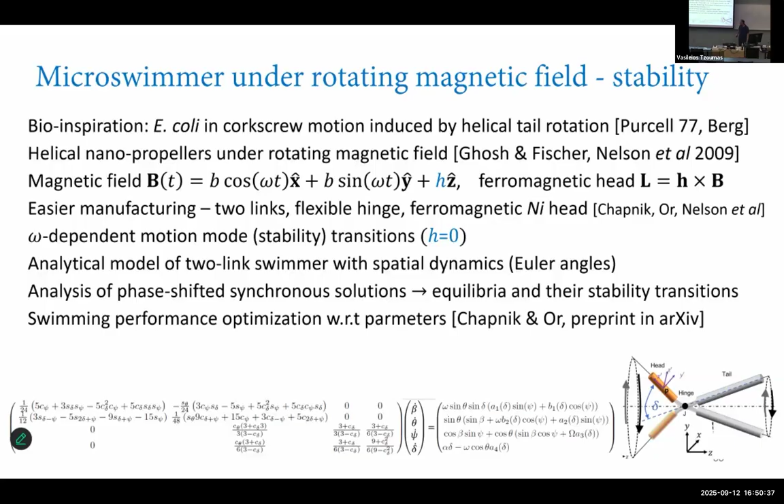I think I will have to stop here because for soft robotics, the time is still rigid and not soft. So at some point there is a hard constraint, non-holonomic constraints on the timing - or is it holonomic maybe? Okay.